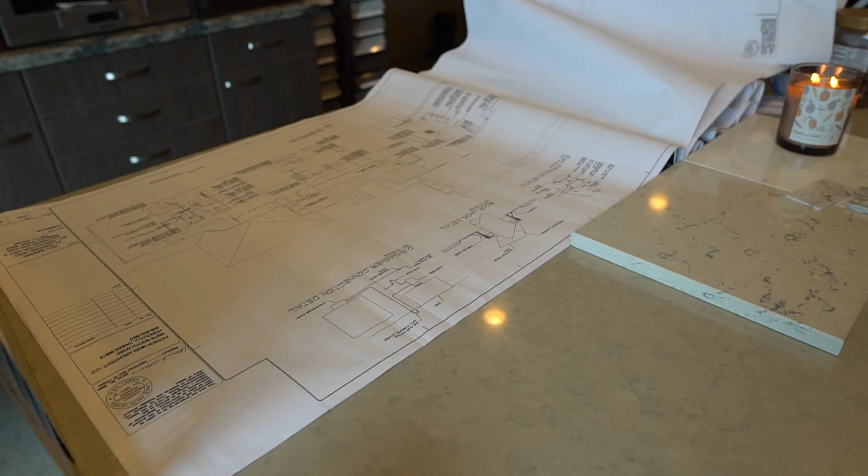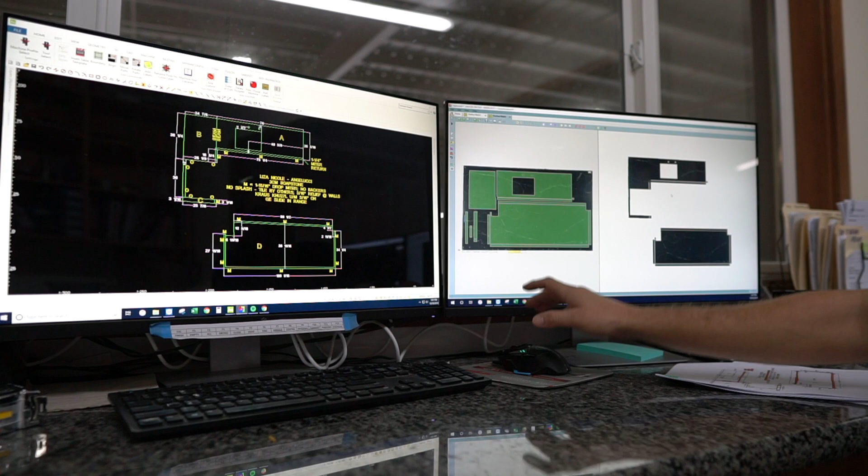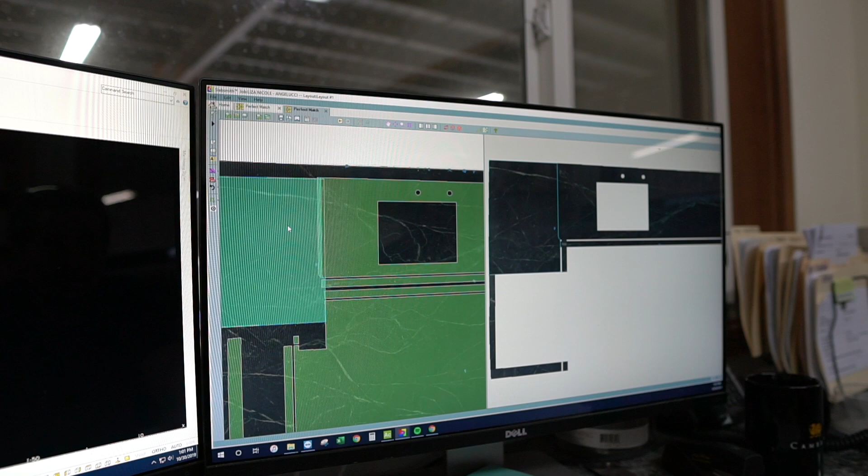This is what the final drawing looks like here. Then I'm able to add in all of our laminations and everything, and then I can actually overlay it onto, this is a picture of the actual slab. And you can see when I move these pieces, it's actually going to show me what that seam is going to look like.

So I played around with this layout, trying to get that seam right, because we just needed to have that seam there. And this was, with the limitations of running our blades through and everything, the closest and best I could make it.

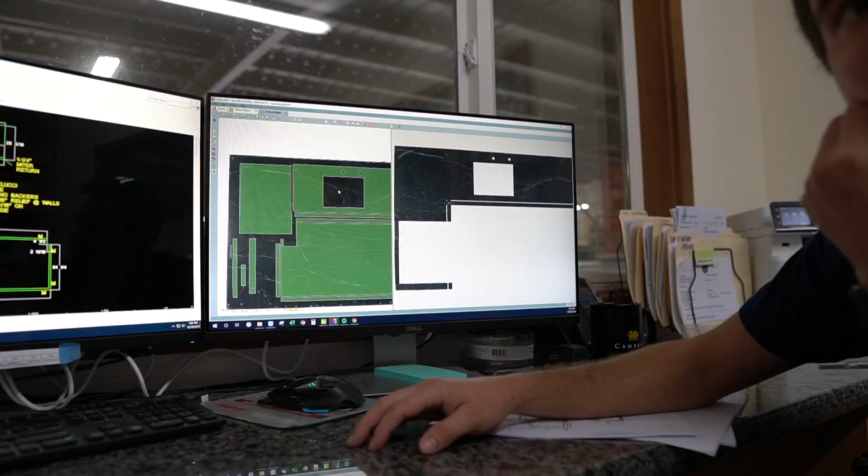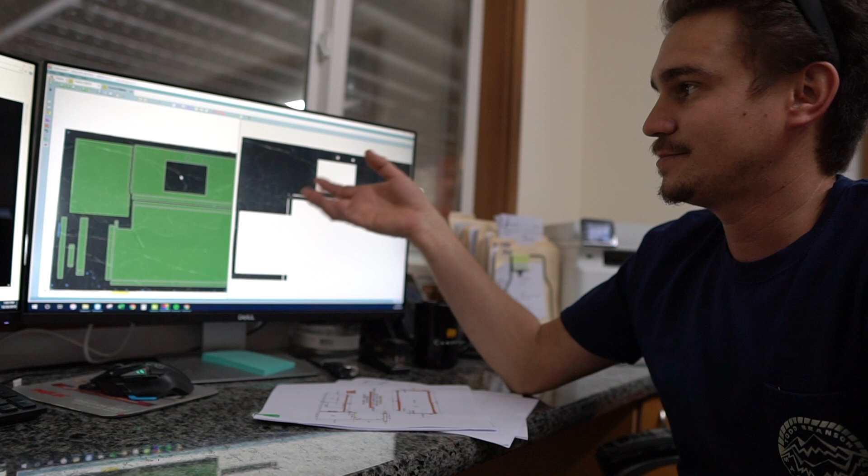So back east, I actually had my seam running down the middle of my sink. Oh, so yeah, talk about why that's not a great idea. We've tried it several times over many years, and it's almost always failed. Just because of water getting under there. Sinks sometimes tend to move a little bit and the seams will pop. We can't ever guarantee that to work, and we like to guarantee our work.

Yeah. So it's a little bit more of a seam. It's actually less out of your way though. Having it there in the middle of the sink, it does kind of disrupt things a little bit, even though it's barely there. But we've just never had one work out.

Yeah. No, it's good to explain to people why, when they do see their templates, why and maybe why not, or to push back. And people always try to have us do that, and we really just won't do it. Because we've lived and learned already, and it's just something we can't guarantee.

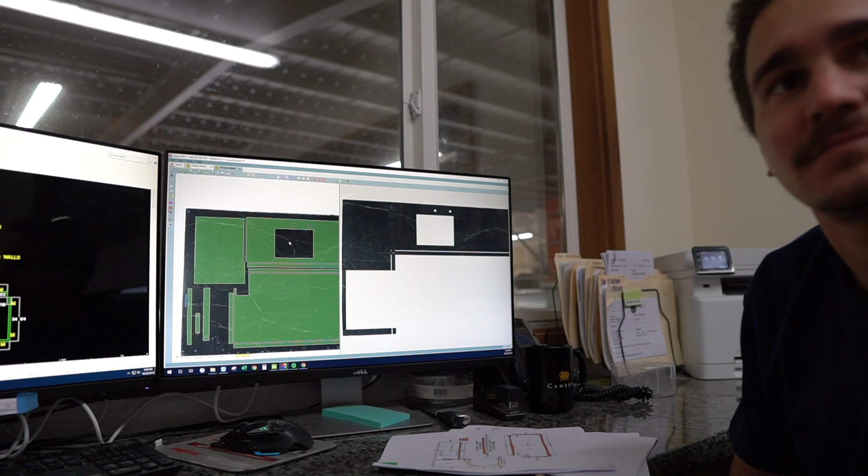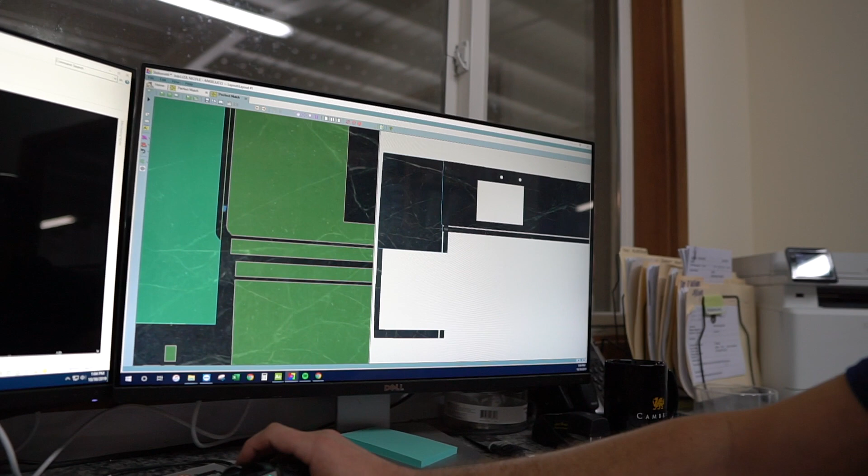Yeah, and I like the corner being totally open, and I know a lot of people still cut seams at the corner. What's your guys' thought on that? What do you mean, like a straight off of here? So a lot of folks will cut the seam that way, so diagonal. Oh, well, what that does is it doesn't really shorten the piece or make it use the material any better.

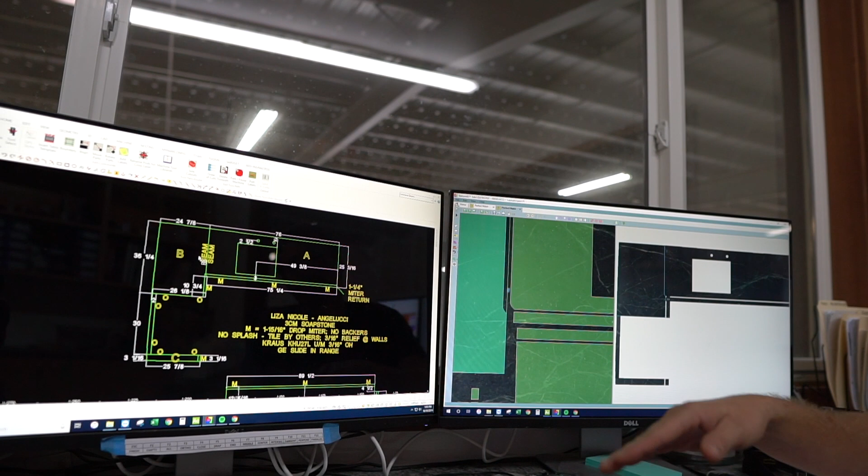Right. And it actually makes this a longer distance than this is. So it's a lot harder to level. It probably wouldn't fit in the elevator like that. So this is to actually make the piece smaller and more usable on the material.

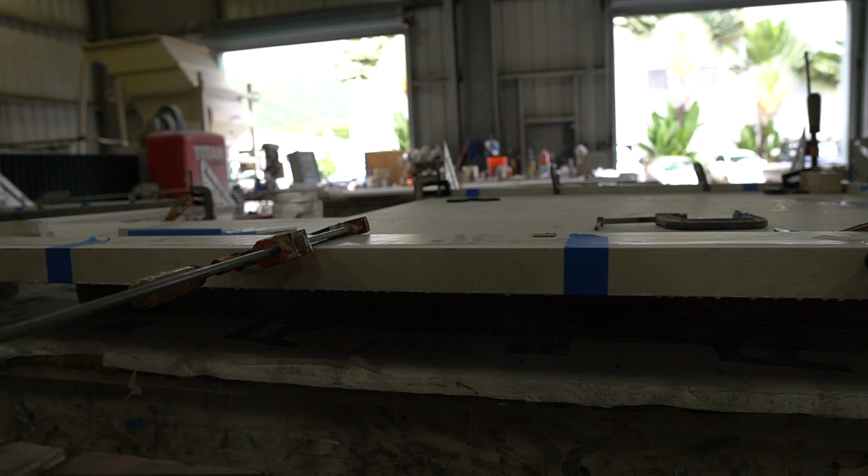So this is going to be how we glue your mitered edge up. This is actually a lamination here, and the piece is upside down. It looks a little archaic, but we've been doing it like this for so long, and we just know how it works. They've got these fancy clamps that they sell for $500 a piece, but we know what works. So this is basically how your edges will all get glued on there.

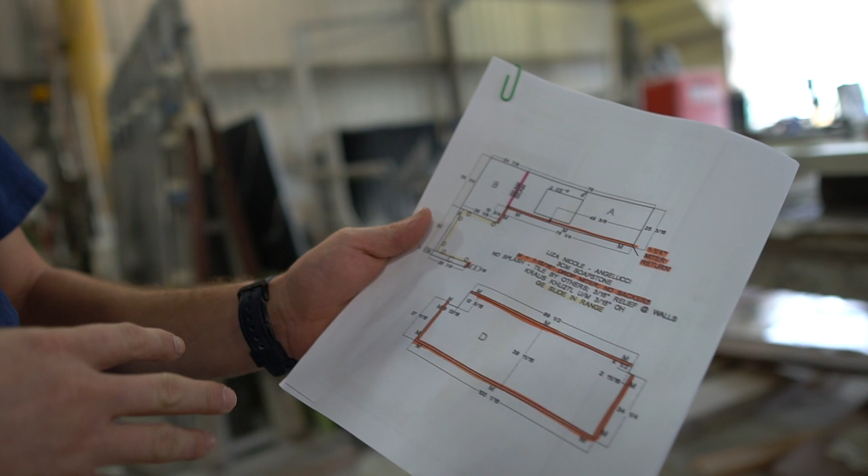After that's done, it's gonna go onto the Titan here, and that's where we'll finish the seams. We'll make them nice and smooth. The sink will get done by hand, and the walls will already be scribed in from that machine. So it's basically just going to be the seams. I'll probably finish the height of that miter so that it'll all be consistent, and then it'll get sanded and polished and be done, installed. And hopefully it fits in the elevator. Hopefully.

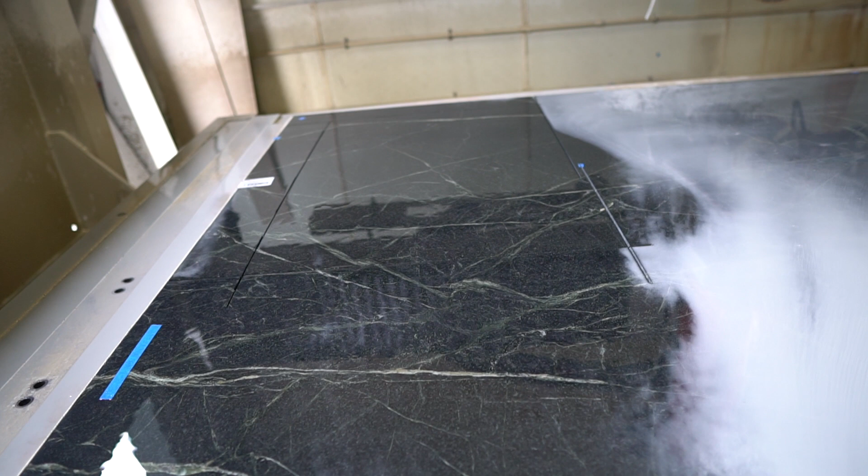It's today, counter installation day. We could not be more excited because this means now that this hot mess express of all of the appliances, we can put in the oven probably tomorrow. We have to move the plug that was originally just a tad too far over for the oven because I changed the plan a little bit, so we need to move the plug over so the oven can fully slide in. So we should get that in tomorrow. We have electric now. Oh yeah.

Stay tuned. More to come. Ready, aren't you excited? Very.